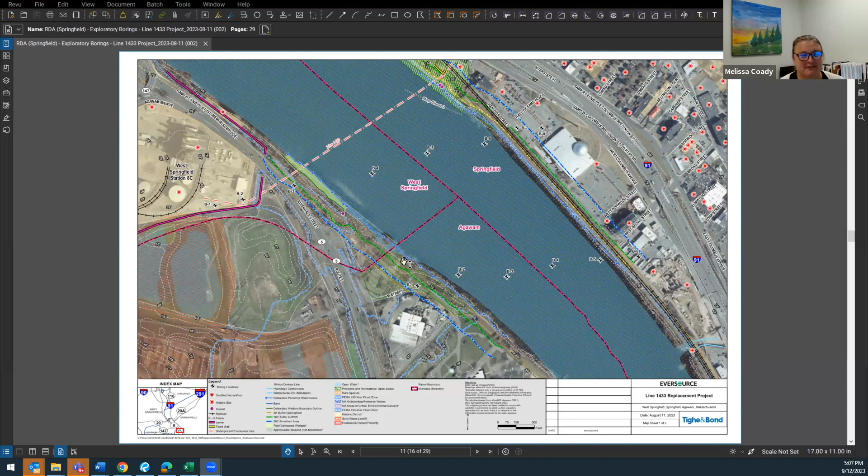Correct, so this is downriver from lines 1544 and 1755. I am not going to do that to you - I'm not going to do that to myself either. So I will zoom in here a little bit. The red line here is the existing line 1433 alignment, and as you can see, it continues through Springfield and goes out to the Breckwood substation off Wilbraham Road. The yellow and the purple are two potential alignments that the borings are along in the river. The other project, line 1544, 1755, is roughly in this vicinity, north of the railroad bridge.

With the first one, I believe you sent us a letter saying you would give us a report during the period of active work, and that somebody was going to be on site, right? Yes. And you're willing to send us the same correspondence for this filing? Mm-hmm. And we'll get whatever reports there are on the sediments.

Okay. Are there questions from the committee? Same as last time, so I guess it should move along the same way. Slowly, yes. And I have a copy of those conditions that they approved in West Springfield that I can add to the approval here as well.

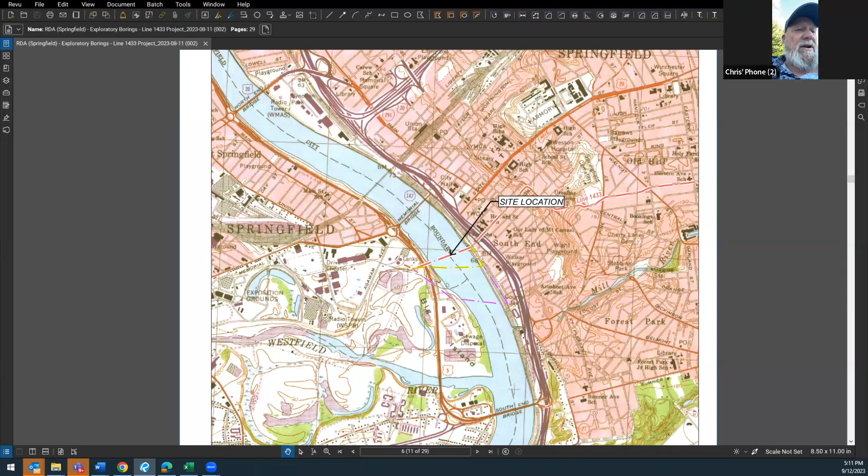Thank you for your presentation. The second item is a request for determination of applicability for an addition to an existing building and site improvements, expanded parking at a property known as 1597 Allen Street. Thank you very much, Presbyterian Church.

How's everybody today? Can you hear me okay? Mm-hmm, yeah. Fantastic, thank you very much. My name is Jon Goddard, I work at JG Site Services, and I'm here tonight on behalf of the applicant, the Christ Presbyterian Church. Let me see if I can crank up a couple screens to share. Why don't we start by getting oriented to the site, and then we'll dive into the meat and potatoes of the RDA.

Let's see if it'll let me flip over to GIS. We're lucky—oh, there we go, fantastic. So here we are, we're looking at the City of Springfield GIS website. We've got our highlighted parcel here, woodlands to our east, woodland to our west, the residential communities, and the professional development off to the northeast.

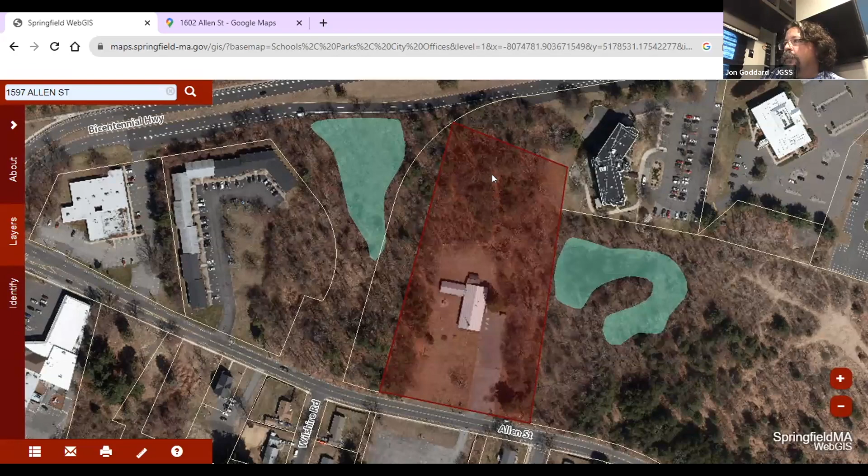I do have the city's wetlands layer turned on so we can see that they show at least some GIS signatures both to the east and west of the site. You can see that we have a developed portion of the property as well as woodlands east, west, and to the rear. Let's take a moment and we'll dive into the existing conditions plan.

Okay. Some of the highlights I want to share with you from the existing conditions survey include an on-site isolated vegetated wetland, and that's the 100-foot buffer and captures some of the green space to the rear of the existing church and even grabs a portion of that existing structure. So that's a local jurisdiction only, IVW.

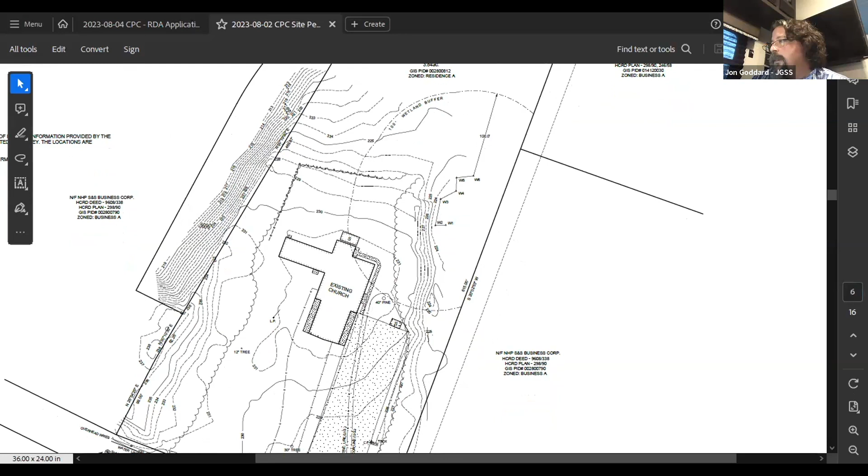On our design plans, the off-site wetland didn't appear to be within jurisdictional vicinity. I show the 100-foot buffer from that GIS signature. It is down a tremendous and precipitous slope, but for reference purposes, we'll see just a shadow cast over the property line from that, just to be conservative when we're looking at that. So let's talk a little more about the project at hand—I'll flip over to a sheet that tells us a little more about the program.

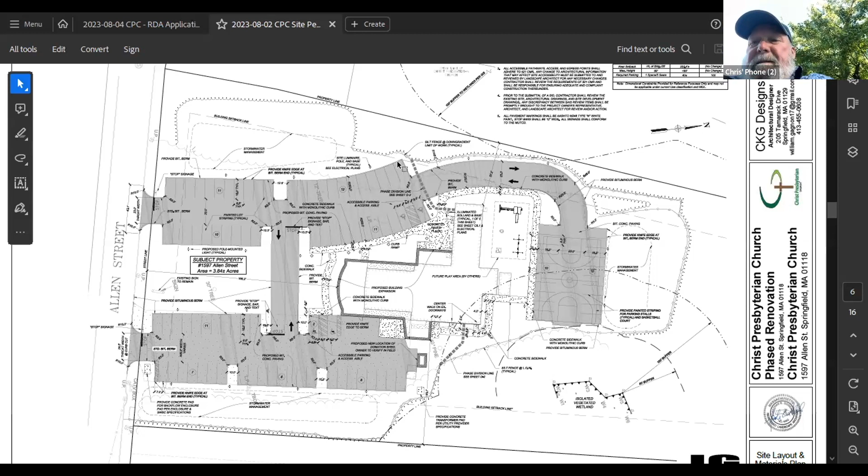I'd like to start with the work that's closest to Allen Street on both sides of the building. So let's talk about your jurisdiction and the work that's to take place inside of that. If I flip down.

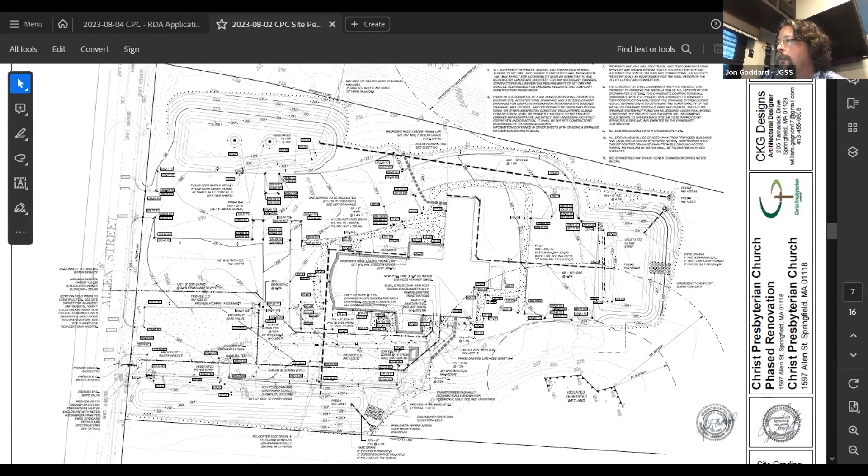So you're now looking at our little update, our utility sheet. I'm going to zoom in a little bit and reorient us to that buffer zone. Let me move a menu bar out of my way. There we go, that's much better.

Okay, so we have the signature of that isolated vegetated wetland, the 50-foot and the 100-foot buffer. Again, grabbing the corner of the building, there's a small amount of work that we need to do within conservation jurisdiction under this phase 1, and that relates to bringing new utilities to the building. There are existing utilities within this portion of the building that need to be upgraded, and a small portion of that just goes into the outer portion of the 100-foot buffer.

Justification for that work is that this is within existing altered land. This is lawn area. This is roughly the location of the existing parking lot. So we need to go a little bit into that lawn area within buffer zone and connect those new utilities to the building.

So the big picture to share with you is that this portion of work would fall under a request for determination; at least that's the request before you. As the project progresses, the applicants will be returning with a notice of intent for the work that's within jurisdiction, including the remaining walkways, the rear parking, and a portion of the stormwater basin at the rear of the building. So for the present time, we are proceeding through the local departments and the Conservation Commission to receive incremental approvals for the proposed work.

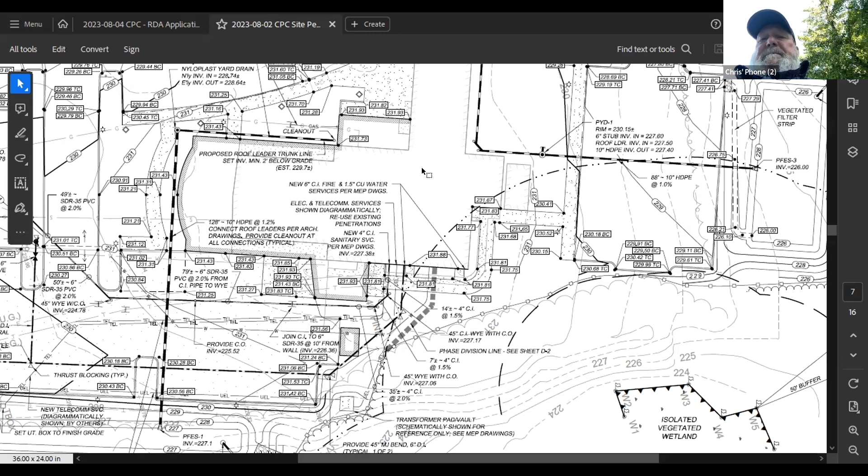I'll stop sharing for a moment, but welcome any thoughts or questions you may have. Commissioners, do you have questions? The work showing here is just the utility work.

Obviously, I don't see that we're going to have a lot of concern with this. Your notice is going to be involved in the second part of it because it comes very close to that regulated land, but this one seems fairly straightforward. That's correct.

Do other commissioners have questions? No, because it states the same thing.

It's just that little piece where you're trying to bring electricity in, right? That's it, that's the only piece this is about, right? Am I correct? I had a hard time understanding you because you were cutting in and out, but I apologize. That's okay. But from what I understand, it's just that little piece that you're presenting tonight. That's correct. There are some underground utilities, including water, telecommunications, and electrical, that'll be reconstructed in that vicinity in the existing lawn area. Okay.

Any other commissioners have questions? May I? Yep, who is that? Who's that, I can't see the screen. It's Frank Ryan. Okay Frank, go ahead.

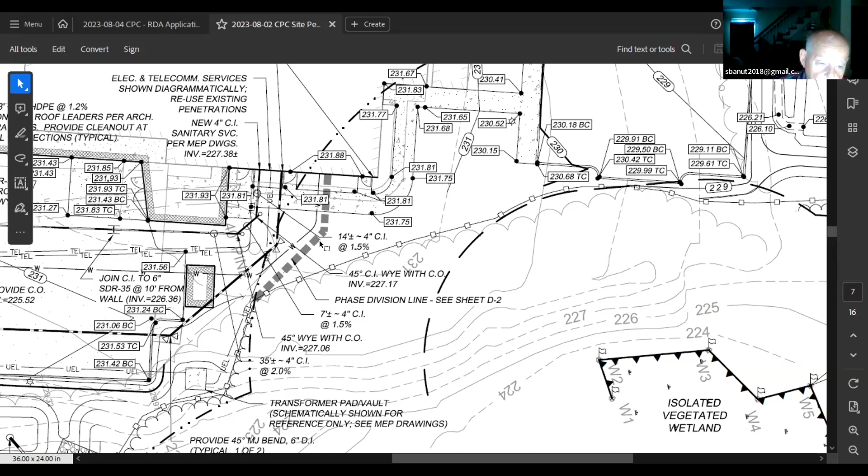You mentioned some parking back here. Can you enlarge this? Let's talk about the amount of parking you'll be requesting in the future, that'll help us with this south and east section we're concerned about. Sure thing, I'm going to go back one sheet because it shades out the parking.

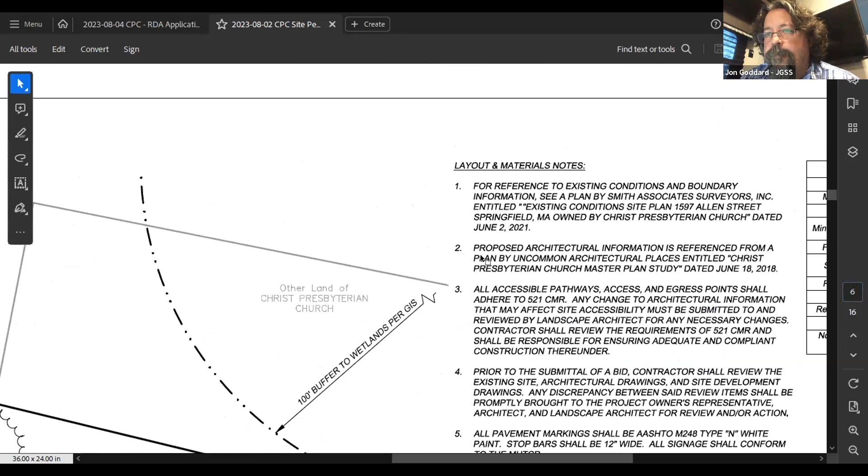And we'll look at that as it relates to the IVW. We'll give it a second for it to pan over. Waiting for one computer to catch up to the next one. Okay.

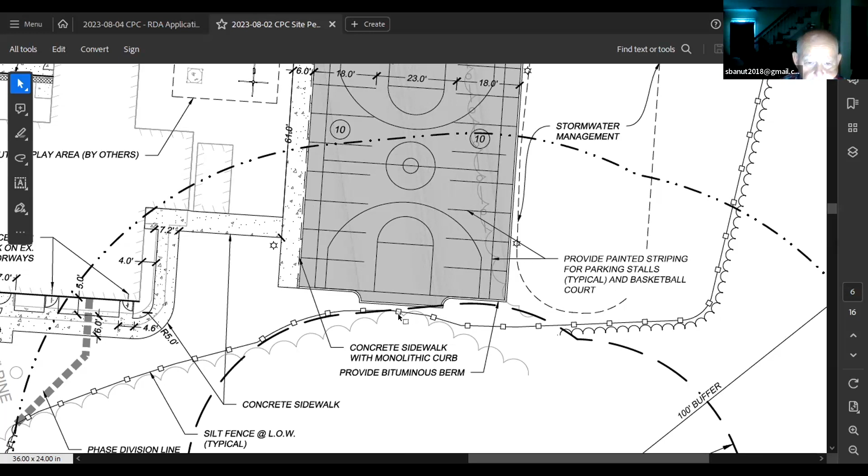At the rear of the building, you may recall there was some lawn area and wooded area. This right here is the existing wood line to the north, and this is the wood line to the east. These squares along the lines are my silt fence signature. So the intention in the back, as it relates to the 50-foot buffer, is to respect as much of that as possible, except where lawn area already extends into the buffer zone. So we have a small amount of grading associated with that.

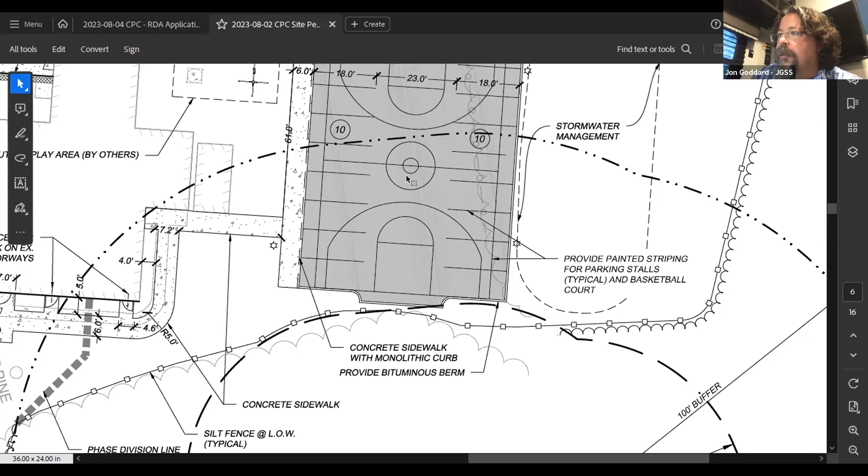Other work within your jurisdiction would include the clearing and grading associated with this basin. Okay, so there's a stormwater basin, and I'll zoom out a little bit so we get better context. With your cursor, would you show us where the utility lines are going in?

Yeah. Okay. I've lost east and west here, north and south. North would be right. Frank, can you see his cursor? Move your cursor so Frank can see it. Yeah, got it, there you go. Okay, now are you in the southeast corner there? We are in the northeast or so section of it.

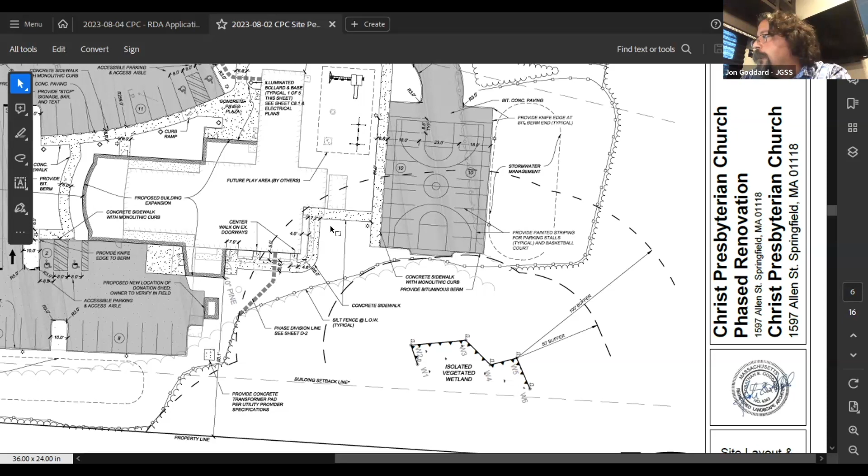Something's not making sense, let me zoom out and show you the whole screen. Allen Street's to the left of the plan, Frank. The top side is west of this. The church building is to our right near the buffer zones, the eastern buffer zones. The church building has the heavy black line surrounding it. The power line, if you want to orient to the screen, is just below the little divot that comes out for the side of the building there. That's where the power lines are going. Okay, thank you very much.

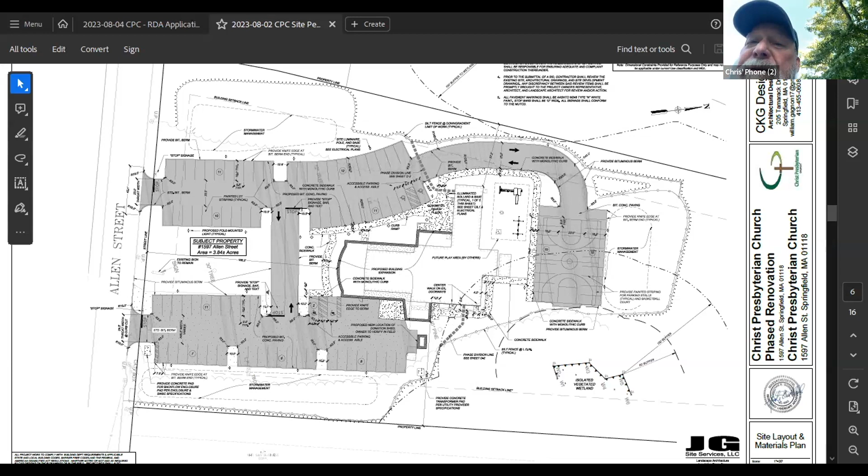Now, how close is that proposed parking here? Under the future notice of intent, we're looking at roughly 50 feet to the IVW. Could you describe the existing parking and the future parking?

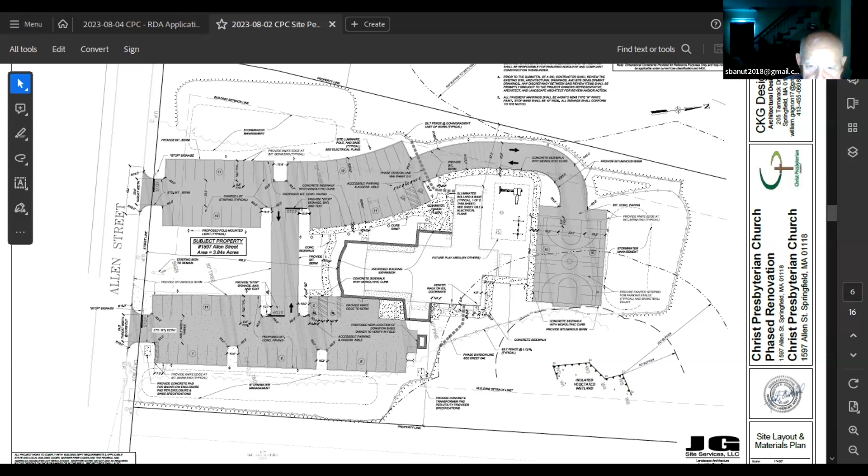Sure, especially here on the south and east. Okay, so the existing parking area is over in this vicinity. It does extend along the side of the existing church. This little signature right there, if you're familiar with the site, there's a donation receptacle at the property that I'd like relocated. So the existing parking is outside of conservation jurisdiction, but it will be repaved and the geometry corrected to work better with zoning constraints.

The parking we're looking at towards the top of your screen, that's all under a future notice of intent.

In the number of pages we were sent, there were pink flags to the east for a minimal wetland. Where is that? That's what I am showing right along this area - these six flags right here.

When you walk into the property, behind the donation receptacle, you can see the wooded area. What we see with our eyes for the lawn and the building pad was clearly prepared for construction at some point in time. We'll call this area historically altered. So we can see signs of mechanical movement of soil over time that has now led to the opportunity for this isolated vegetated wetland to become established.

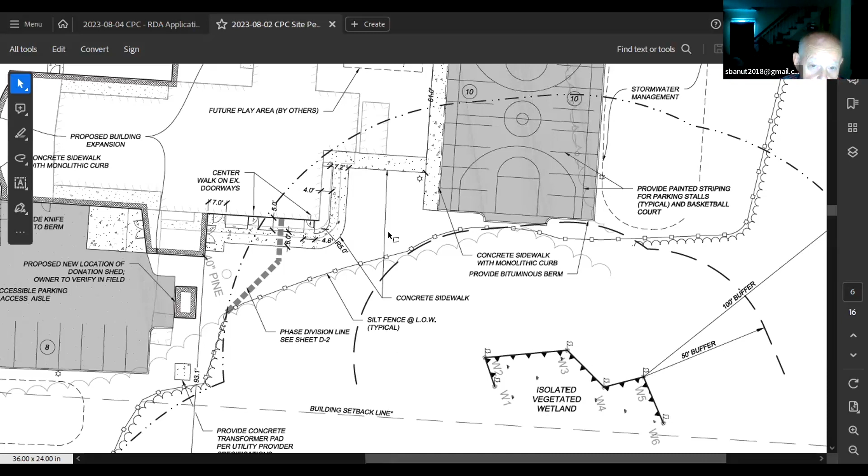Any more questions, Frank? No, help me out one more time. As we are viewing this now, is Allen Street at the top of the screen or to the left of the screen? Over to the left side of the screen, straight out from the church. Okay, thank you, now I've got it.

Yeah, let me empathize. I've been struggling with it for quite some time.

So thank you. Are you planning that much more additional parking? Eventually, yes. That's not part of this petition. I agree, Juanita. Thank you. Oh okay, thank you very much, Chris.

So just to recap before we entertain any motions, the only thing before us tonight is the border of the isolated land subject to flooding, which was established a while ago in another filing, and the little bit of work in the grass area for connecting utilities. Those are the only two items before us tonight.

Thank you. So the motion we'd be looking for would be a positive determination because we are setting the wetland border, and there's a number on there to check, Phil, for saying that it is agreeing to the wetland border as presented.

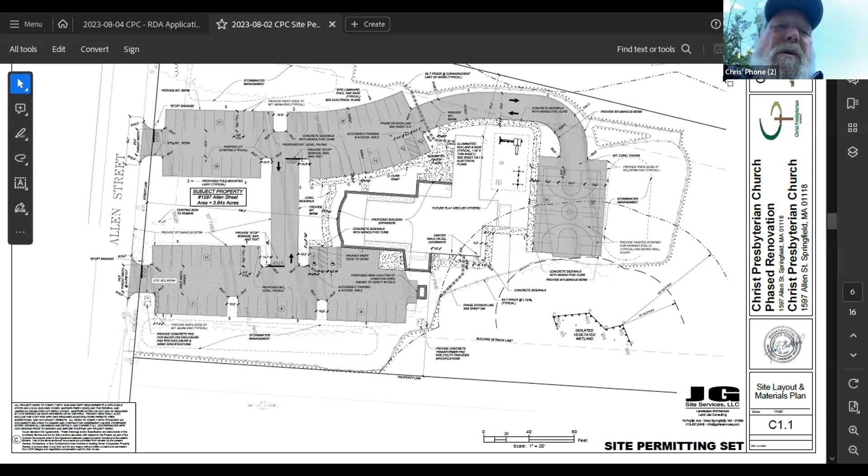So voting to close the public hearing: Mr. Collins, yes. Ms. Martinez, yes. Mr. Alminius, yes. Mr. Miller, yes. Mr. Jones, yes. Mr. Ryan, yes. And Mr. Bongiorni, yes. Okay, thank you very much.

The next item before us would be under item 4, which is a request to extend an order of conditions for 12 months. Since that's what's before us, they could have requested up to 36, but they have so far only requested 12. I can't remember ever denying a request to extend an order unless someone has some significant reason why they think we shouldn't.

So as you said, we're requesting 12 months because in the next 12 months - this is for Watershops Pond - our 401 water quality certificate and our Army Corps approval will both expire. So we don't need to extend our order of conditions beyond that. Well, that makes sense. Okay, thank you. Then I would entertain a motion to extend the order of conditions for file number 7592.